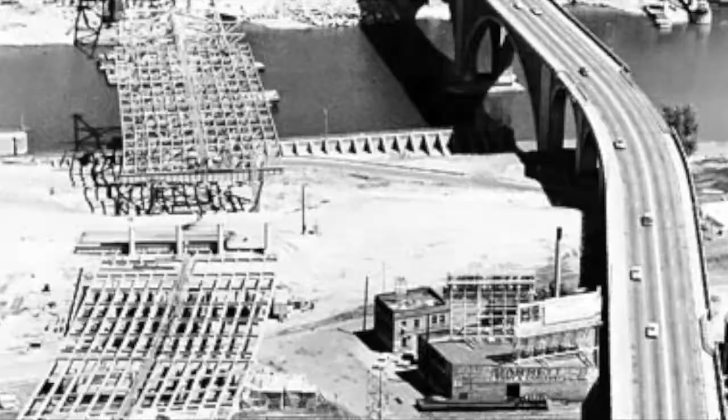The I-35 West Mississippi River Bridge was an 8-lane steel truss arch bridge that carried interstate I-35 West traffic across the Mississippi River in Minneapolis, Minnesota. Construction began in 1964 by Hurcon Incorporated and the Industrial Construction Company. It opened to the public in November 1967.

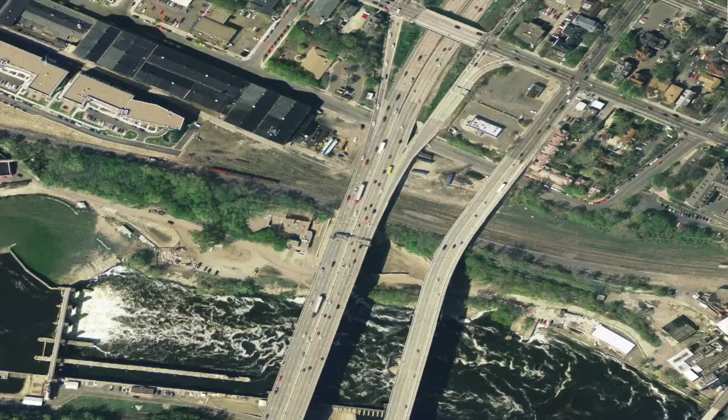It spanned a gap of 1,907 feet across the river. The bridge connected the Minneapolis neighborhoods of Downtown East and Marcy Holmes.

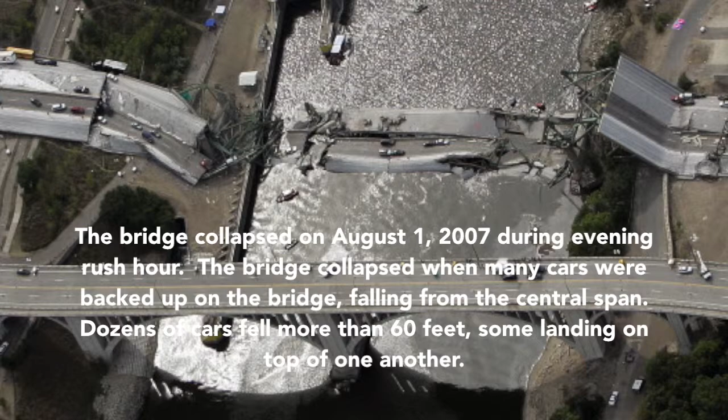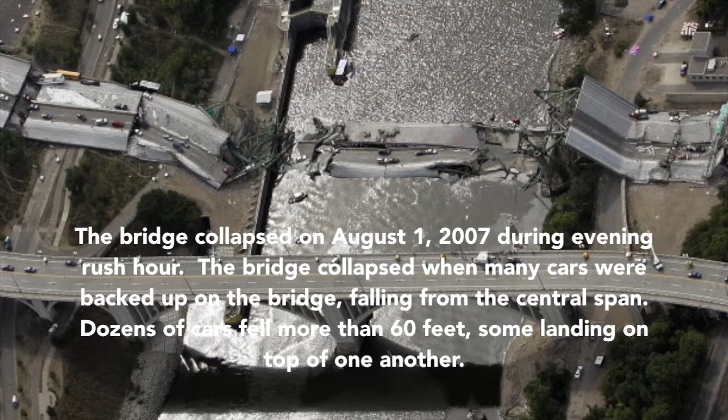The bridge collapsed on August 1, 2007 during evening rush hour, when many cars were backed up on the bridge, falling from the central span. Dozens of cars fell more than 60 feet, some landing on top of one another. Some cars were fully submerged in the banks of the river, while others were stranded on the collapsed sections of the bridge. Several vehicles caught on fire.

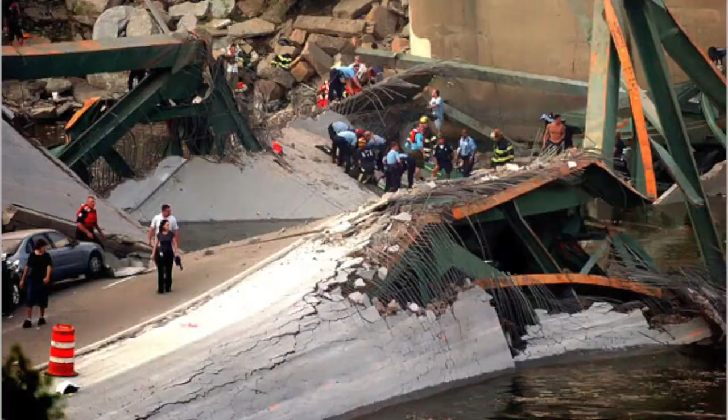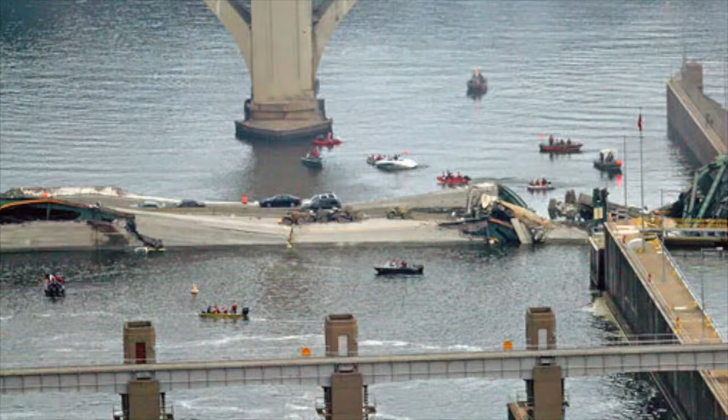The Minneapolis Fire Department arrived to the disaster in 6 minutes, helping civilians who were trapped in their cars. Rescue of victims stranded on the bridge took 3 hours to complete. 145 patients were transported to a nearby hospital to get immediate medical attention.

The next morning, rescue efforts shifted their focus to recovering bodies from the water and the rubble. This took 3 weeks to complete.

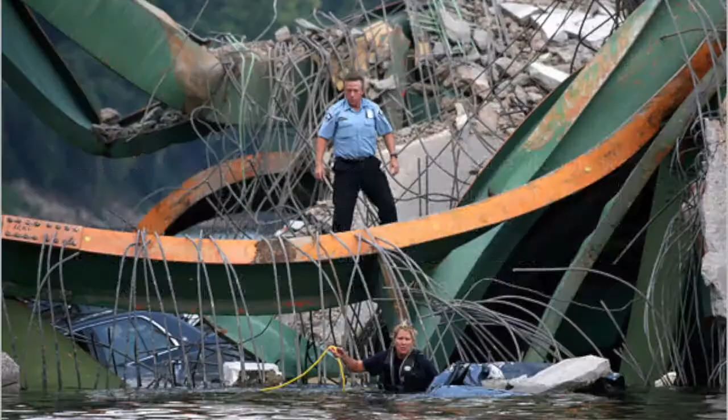Investigation efforts began after all of the victims were recovered. The National Transportation Safety Board led the investigation, which took around 15 months to complete. The structure and construction of the bridge was determined to be the cause of the collapse.

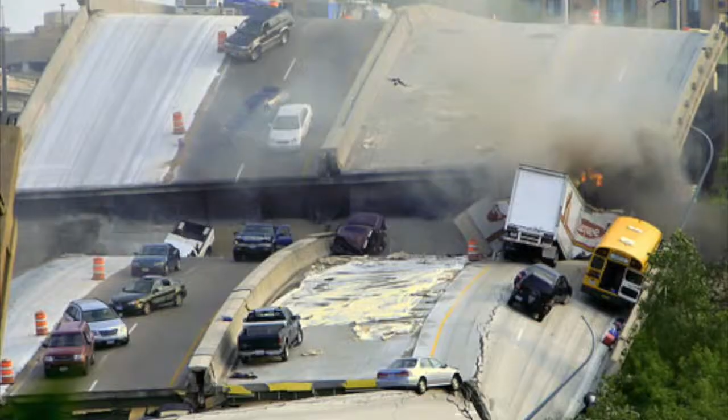13 people were killed and 145 injured in this disaster. Many of those injured had blunt trauma injuries and were taken to nearby hospitals.

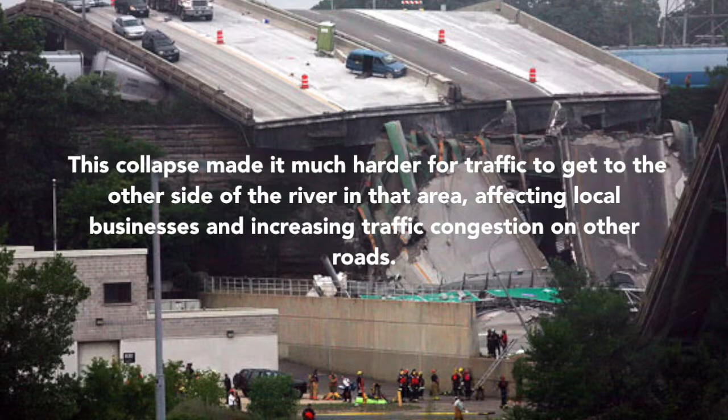This collapse made it much harder for traffic to get to the other side of the river in that area, affecting local businesses and increasing traffic congestion on other roads. The total cost of the collapse to the state of Minnesota was estimated to be around $400,000 to $1 million per day.

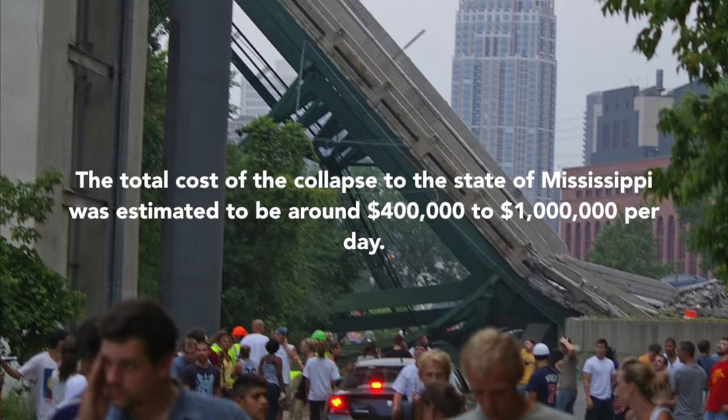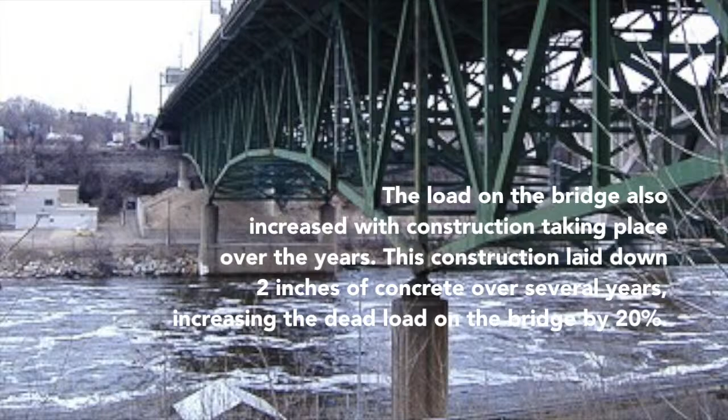Over time, the bridge's load increased due to an increase in traffic, with about 140,000 vehicles going across the bridge per day around the time of collapse. The load on the bridge also increased with construction taking place over the years. This construction laid down 2 inches of concrete over several years, increasing the dead load on the bridge by 20%.

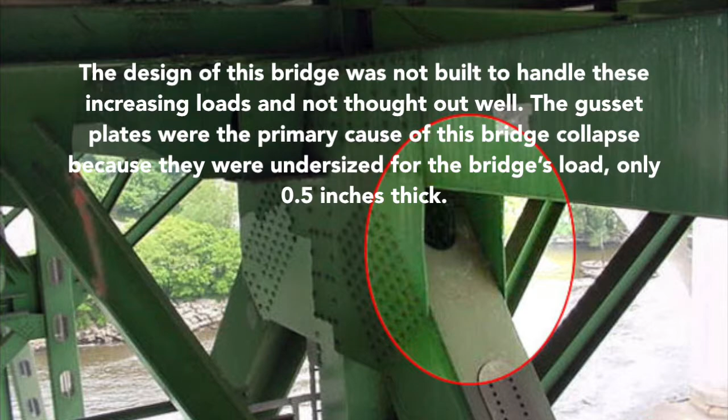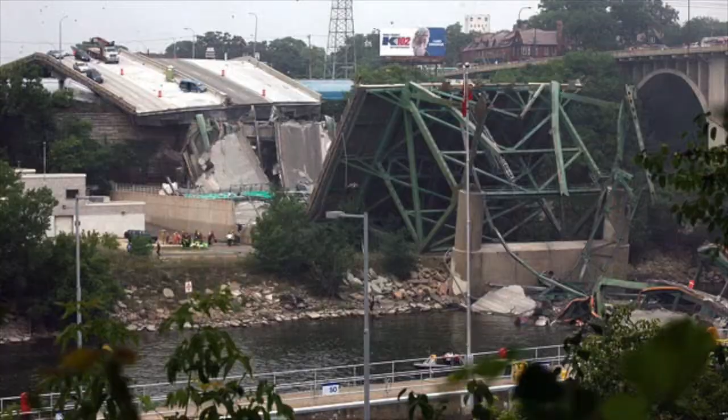The design of this bridge was not built to handle these increasing loads and was not thought out well. The gusset plates were the primary cause of this bridge collapse because they were undersized for the bridge's load, only half an inch thick. Additionally, at the time of collapse, construction workers were working on the bridge, adding an additional 578,000 pounds to the load, consisting of sand, water, and construction vehicles.

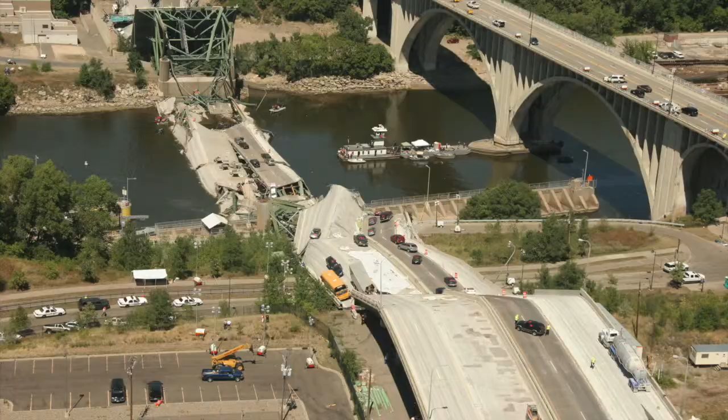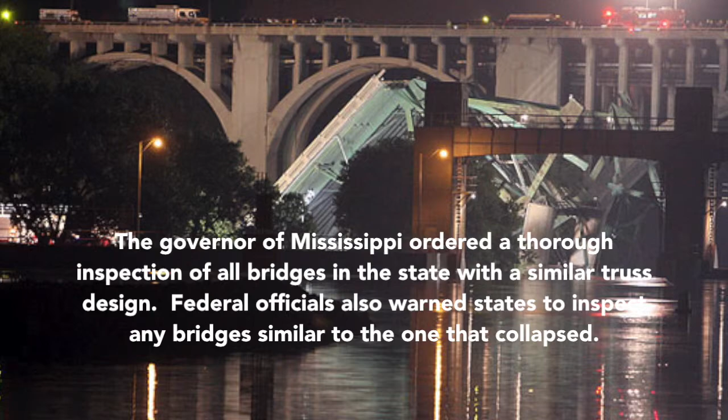After this bridge collapsed, it led many other people around the country to inspect bridges of similar truss design for any sign of failure. The governor of Minnesota ordered a thorough inspection of all bridges in the state with a similar truss design. Federal officials also warned states to inspect any bridges similar to the one that collapsed.

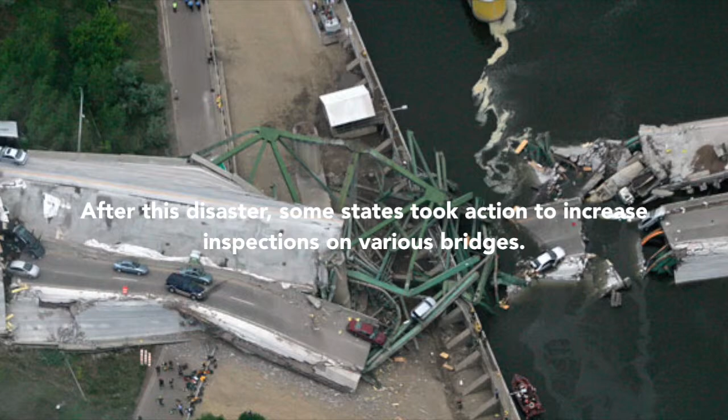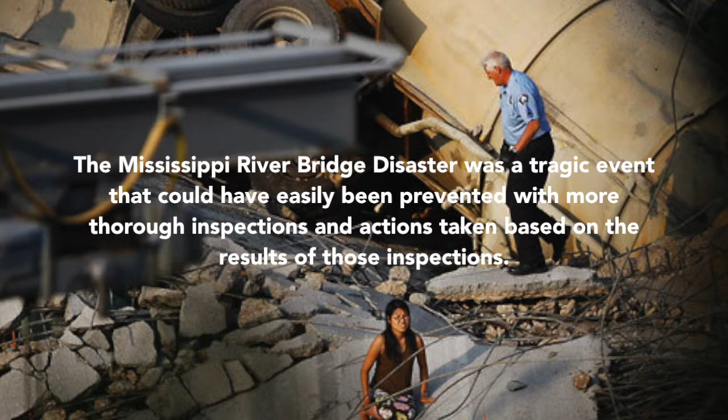After this disaster, some states took action to increase inspection on various bridges. A new, modern bridge was built in its place. The Mississippi River Bridge disaster was a tragic event that could have easily been prevented with more thorough inspections and actions taken based on the results of those inspections.

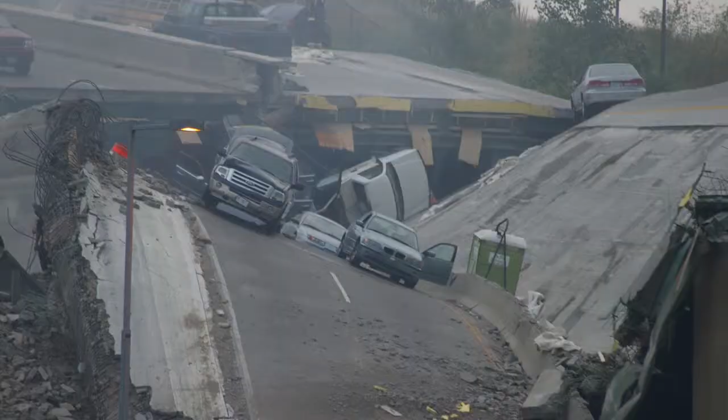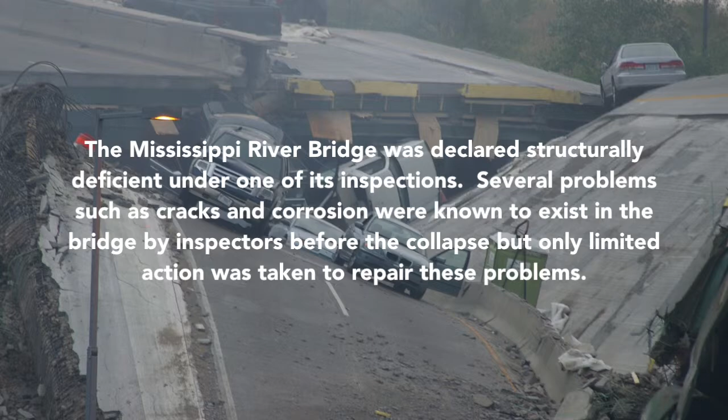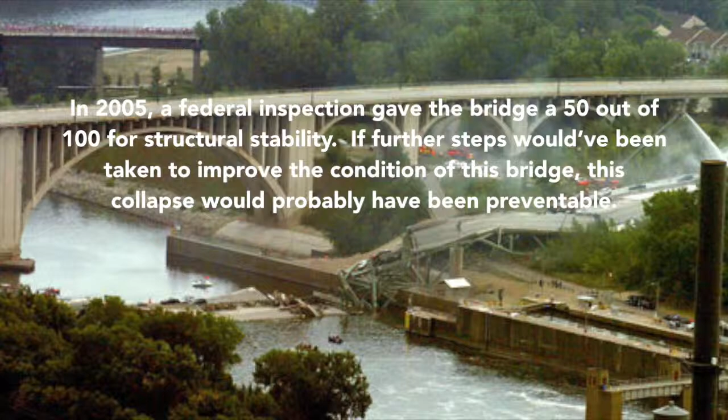The bridge was declared structurally deficient under one of its inspections. Several problems such as cracks and corrosion were known to exist in the bridge by inspectors before the collapse, but only limited action was taken to repair these problems. In 2005, a federal inspection gave the bridge a 50 out of 100 for structural stability. If further steps had been taken to improve the condition of this bridge, this collapse would probably have been preventable.